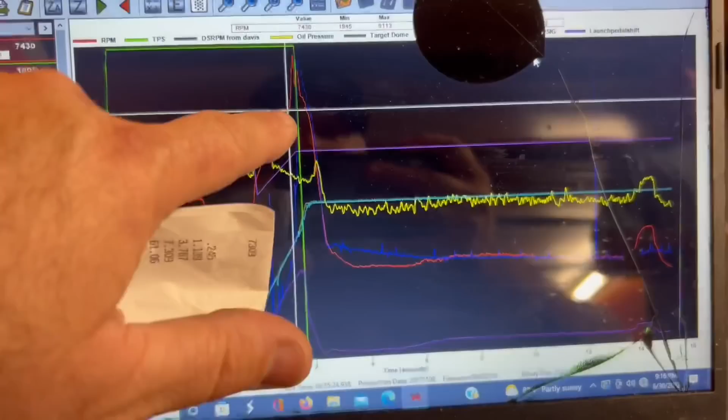It did shift - Randy said he felt it shift when it got way up there. So we're going to just basically stretch my launch out, I got this sorted out to where it's doing a little bit better. It did leave on 8.3 pounds of boost, 8.2 pounds of boost, so that was good. All in all, that's not terrible.

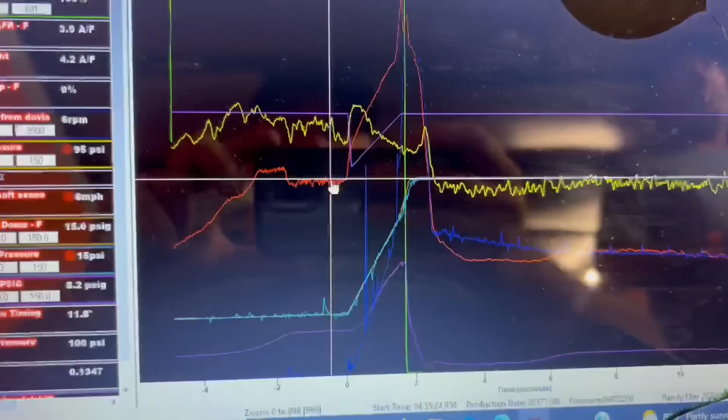So it did spin - track, I mean it's Thursday night test and tune. I was hoping it would be sticky enough to take it, but it did take the 60 foot. That's a phenomenal 60 foot. So let's turn it back a little bit, and then we're going to go make another pass, pulling it down real fast. Chris has made a good lick, he's running pretty good, so track is not terrible.

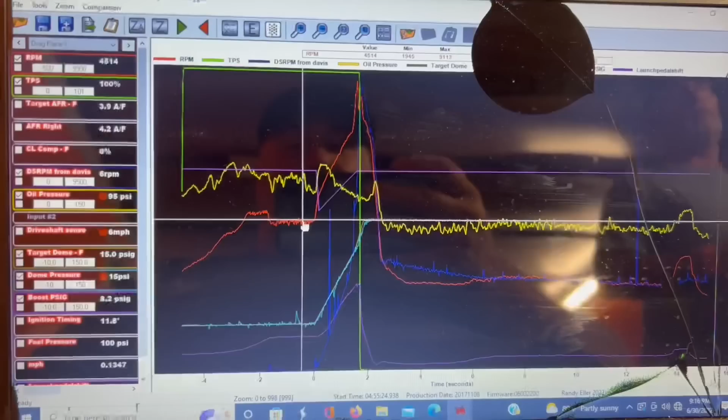We just had a very hot tune-up in it. That's what I told Harold - I was like, we may spin because it's hot. It's very hot, you know, it's a race day tune-up.

All right guys, well here we go, we're about to make another pass. Chris is ready, Randy's ready. Brian and them said the line is back way up down there, so we're going to roll up there.

I stretched the tune-up, stretched the ramp out from 1.8 seconds to 3 seconds, and put a little bit more timing retard in it too. It took off and went to the 60 foot, but the track's probably going to get a little bit worse as it gets later, so we want to make sure we get down. This should go like probably a 4.45 at like 175 maybe, if we're lucky. So that's kind of what the plan is, that's what I think it should go on this pass.

So y'all noticed a bunch of smoke again - they forgot to pull the line off the turbo, so those of you wondering about the smoke, that's what that's from. They tried to clean it out, but you can't get so much out of it. So here we go, we're gonna push up.

All right, so here we go. Randy's ready to lay down a lick. This thing looks good. Thursday night test and tune at Galot. Track is not terrible, guys, but we had a race day tune up in it, so you know, it ain't race day.

They had a little bit of oil down, so they're cleaning up the track. We got a few cars in front of us, so hopefully it's not gonna take too long. It is 10 o'clock. We got an 11 o'clock curfew.

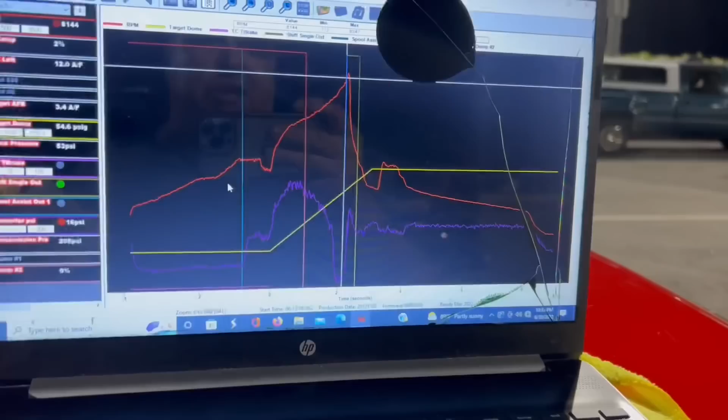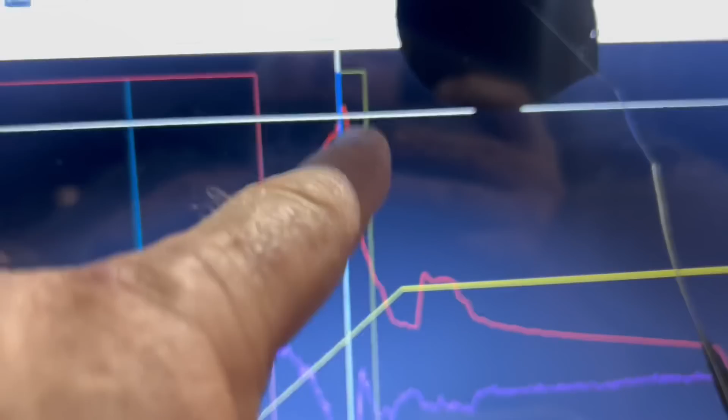So I stretched the ramp way out, made it so it only made 30 pounds of boost out there. But this is where my dumps go off, one dump goes off there, one dump goes off there. And he felt it spin out there on this pass, and so he let off right here.

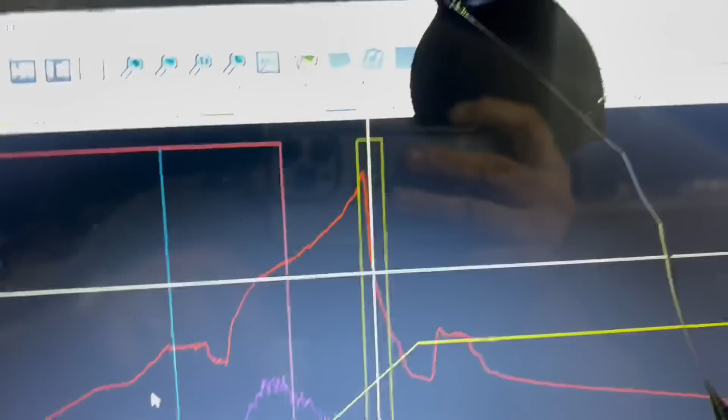It was supposed to shift to 8,000, and I can't tell if it was going to shift it or not. But that right there is, usually it's a couple hundred RPM behind, so that's where it is. And you can see the shift was happening according to the shifter. This is the shifter here. But it knocked the tire off out there.

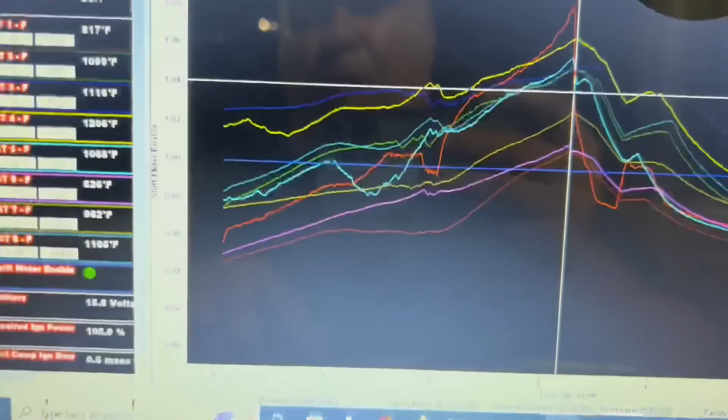I mean, we only had 30 pounds of boost on it out there. It's a testing tune night, you know, Thursday night testing tune. Glue is through the freaking roof. So, track's not bad, but that still should have been like a 445 at 175-ish.

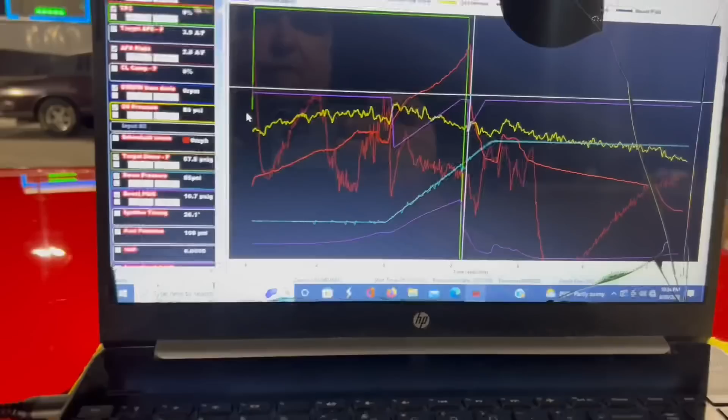So, I mean, it could have been fast. I could have slowed it way down, but I don't think that would have given us what we were trying to look for. But it was a nice, easy ramp. It was taking it pretty good. It only got 30 pounds of boost there.

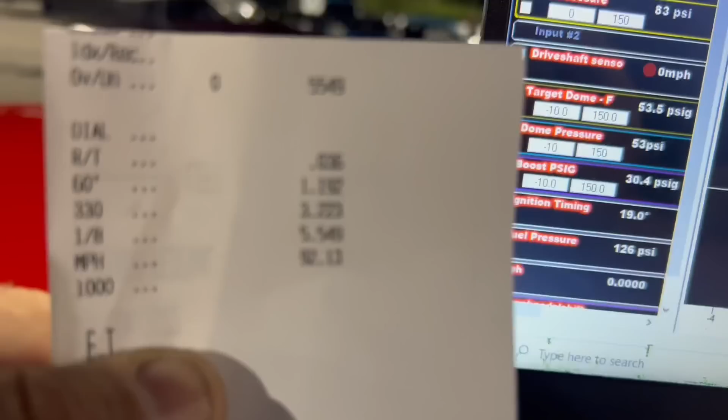But 60 foot slowed down like I wanted it to. Went a 3.22, and he flat lifted just after 2 seconds. So that was going to be a decent pass. Not bad. Had a good reaction time.

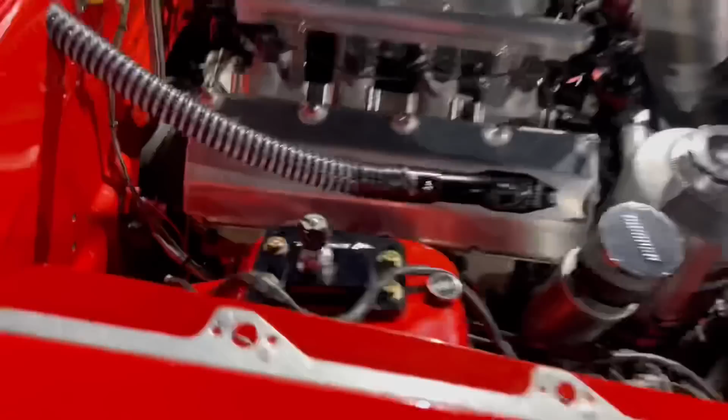Starter's not working now. It's got an MSD starter on it. When we were down there the other week, we were having a hard time starting. It was pulling all the battery voltage, and the electrical part was about to fall off. So we tightened it. So it may be bad, so it's going to need a starter.

Okay, so what's up next for this car? We got a few weeks where we're not going to run it. We'll be racing my car, I think, for 2 or 3 weeks. And then this one will be out soon, though.

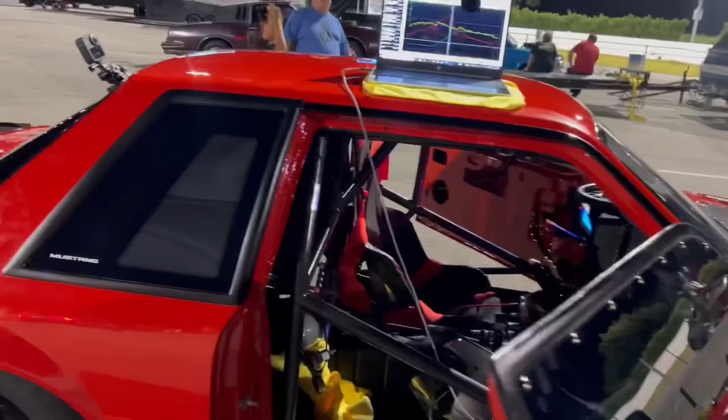So I don't know if it was a bust of a night or not, but we didn't get as fast as we wanted. And we're definitely questionable if the transmission shifted. We think it shifted on the first pass. He's looking down there. The shifter is going into second gear.

If we can get it cranked up, I'm going to get them to drive it through the pit, put a little bit of load on it, go down through there, and then just shift it. But I don't know if it's going to crank it. It may not even crank.